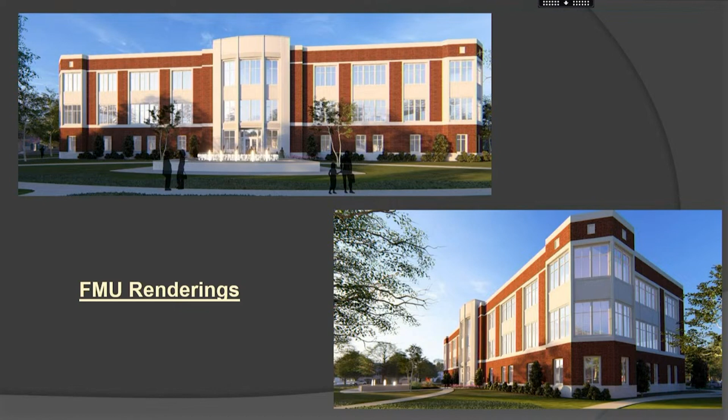The Historical Commission has been notified about the request to demolish and they have not issued any objection to that. These are elevations of the new building that will be replacing it. As you can see, they're mimicking the original building in scale and some of the articulation with the windows and the style, and then just adding a little bit more to it. They're planning to put a fountain out front and making it pedestrian friendly, with some green space. A portion of it will be 3 stories tall, a portion will be 1, I believe. The parking will be in the rear, as is appropriate for the central business district.

So that concludes staff's report.

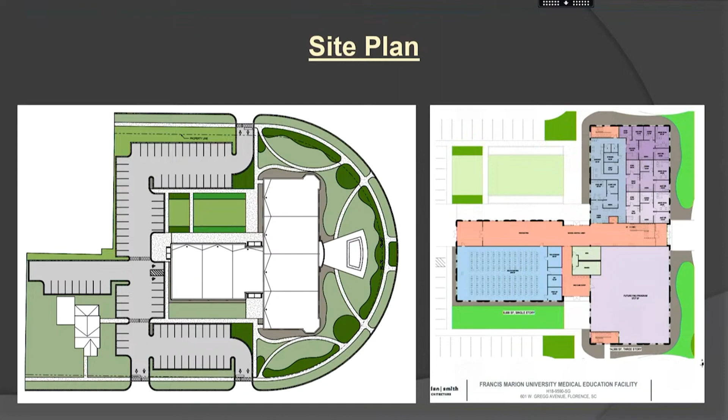I did want to add that although the existing building is being demolished, the university in their design is making every effort to mimic the footprint, the heights, and even the flat roof and a lot of the design elements of the building. Although it won't look exactly the same, it does look like what a more modern rendition of this building would look like. They were unable to utilize the existing building to remodel it for their needs. So this new design pays homage to the old design by keeping the same footprint, the same overall space and size of the building. So visually, when you ride through this area, it'll have the same scale, the same colors, and similar appearance as the existing building. So I did want to note those items.

And we do have staff, developers, or representatives from FMU and the design team present if there were any further questions.

I would like to say I was on the board of directors for Florence County Commission on Alcohol and Drug Abuse that sold the building to Francis Marion. I was also involved as a partner in the building. I don't have anything to do with it now, but I was involved.

Okay. Yeah, and the board doesn't have to render a decision on this. It is a government project over $1 million, so it falls on staff to do the review. We've been working with representatives from FMU and the design team throughout the process, working this through. We're in the final stages, nearing approval, and we wanted to present it to the board for information in case there were any questions or concerns.

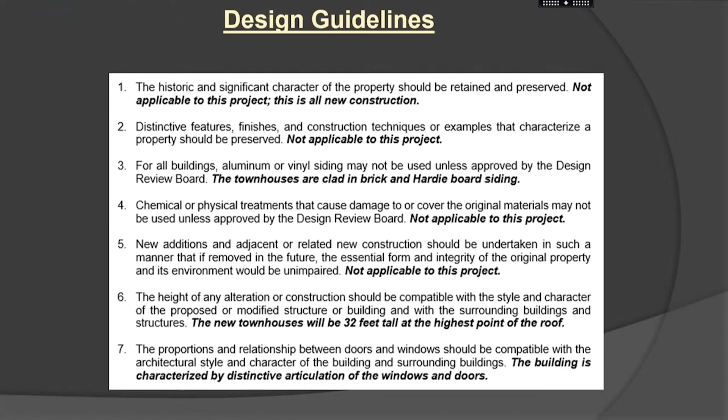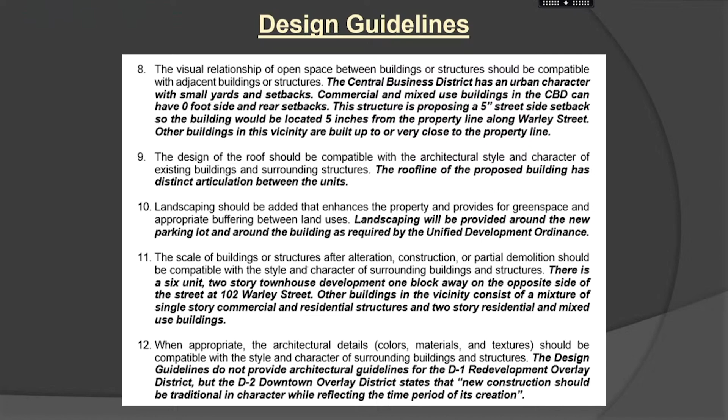They'll be characterized by distinctive articulation of windows and doors as required. Adding the 6th unit does make the lots slightly smaller, and they'll have pretty much a 0 setback on the Warley Street side, which is permitted in the Central Business District. But that would need to be part of your motion to approve that side setback.

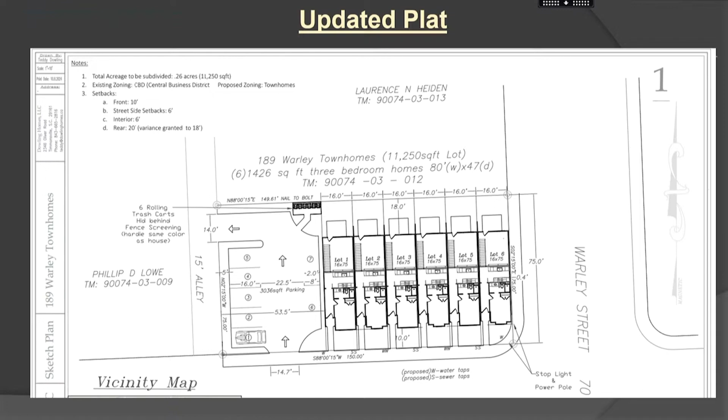Okay, anyone have any questions of staff? Anyone here to speak on the matter? We'll go ahead and close the public hearing and open up the case for discussion.

I do have one question. The parking, I understand it's not required, but isn't there going to be an eventual reconfiguration of that street, Chevis? Yes, part of the penny sales tax, and we counted out yesterday that there would be 18 parking spaces in that block alone on-street, plus there will be 7 off-site or off-street parking spaces as well. So that actually increases the available parking over what's there now.

That's right, because it almost seems like nobody ever parks on that street now. It's almost like you're parking in a driving lane. It does. Right now they're not marked or designated, even though it is allowed on the side of the street.

And it is to be protective and prevent further deterioration. These are some pictures of work they've already done. As you can see, the columns are already covered up and these windows. And then here's some photos of the building itself. They said that all of the trim work would be covered, so that includes the trim around the roof line and through the middle there, as well as the windows and doors.

So at the very top of the roof line, are you able to preserve the little fine molding? I asked them if they were going to cover those individually, and he said they were.

I ride by this building every day between my house and Montessori school, and it was looking rough, and what they're doing looks a lot better. I don't know if it's something about the weather in that area or something, but that building, it's an older building - I remember it as a kid. It's always had trouble. I think that north side really struggles, and that's the side that faces the street more than anything. I know traditionally over the years, they've spent a lot of money trying to maintain what they have. The building does look better there, a lot better.

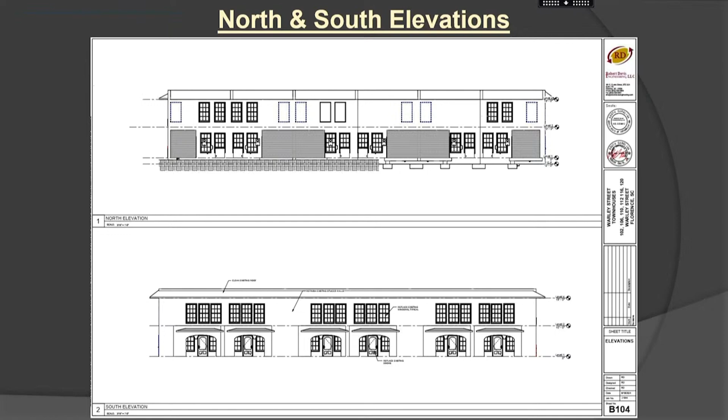Here are the elevations currently, and this is what they hope to do in the future. Everything will be as is, besides everything being stucco exterior for uniformity.

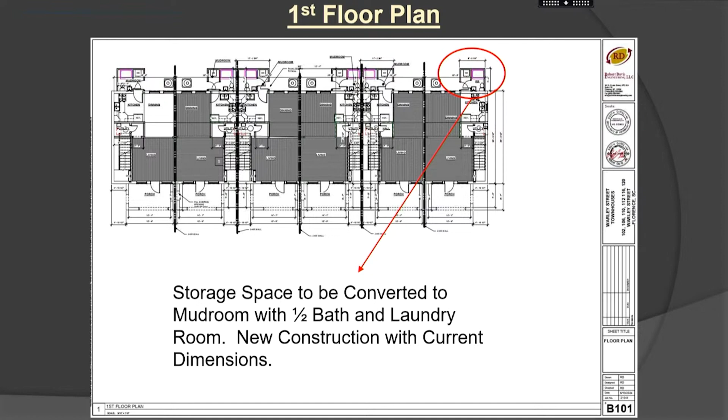Here is where the existing storage building will be demolished and reconstructed. You can see here they'll have the half bath and then the stackable washer/dryer. So instead of being a storage room, it will be a mud room, a place for residents to access, come inside, shower, and do laundry. And here's the color of the exterior, Antler Velvet.

That concludes staff's report. Anyone have any questions of staff? Is the appendage that's going to house this addition mirroring the storage room footprint? It does — we've been assured by the engineer in letter form that it would be exactly the same dimensions. Similarly, the same roofline? Exactly, just like for like as much as possible, except for the stucco exterior instead of siding.

Now I have two questions. With the roofline, what's that shingle material? It's like the stuff you see in Florida. Yeah, the terracotta looking shingles. Right, but I think that's just sort of a facade, and I think they actually did a TPO type roof a few years ago. So they're still keeping the terracotta visible from the street, but on top of the roof it's TPO.

Gotcha. And then the concrete pad that's on the rear of the building — is that going to be for parking, or is that going to remain?